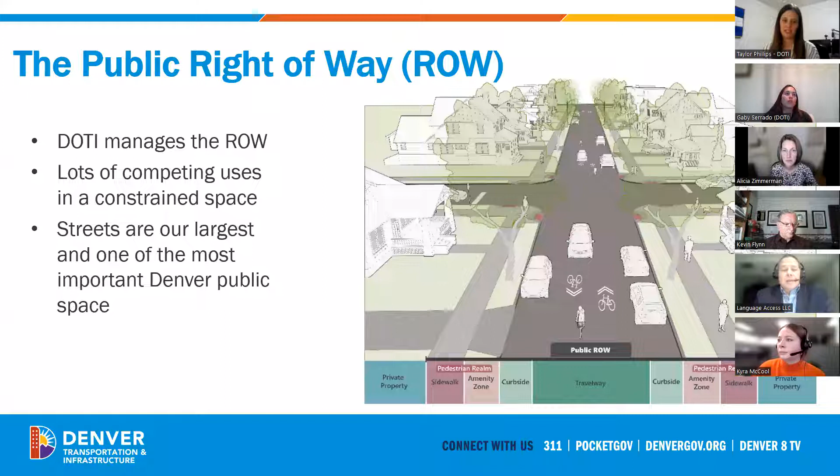So why are we building safe and comfortable bikeways? DRCOG, the Denver Regional Council of Governments, conducted a study a few years back and found that about 16% of people in Denver regularly feel comfortable riding a bicycle in Denver today. We call those the highly confident and the somewhat confident group.

And then 75% of those folks said that they would ride a bike if there were more comfortable facilities to do so. So we call those the interested but concerned group. We're really trying to target this group and provide bikeways that they feel comfortable riding on. This could be anyone from older adults to little kids to just anyone who doesn't feel super comfortable sharing the road with a car.

This is kind of how we got here. In 2011, we adopted Denver Moves Bicycles, our first citywide community-driven bike master plan. In 2015, this project, West Yale, was also recommended again in the update to Denver Moves Bicycles. Then in 2018, this project was again confirmed in Blueprint Denver as a bicycle priority corridor. And now here we are today - we've identified this opportunity to restripe the roadway through a planned paving project.

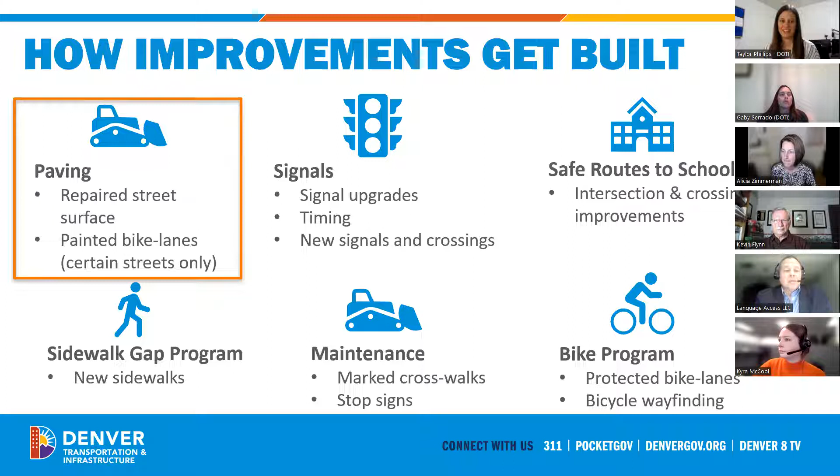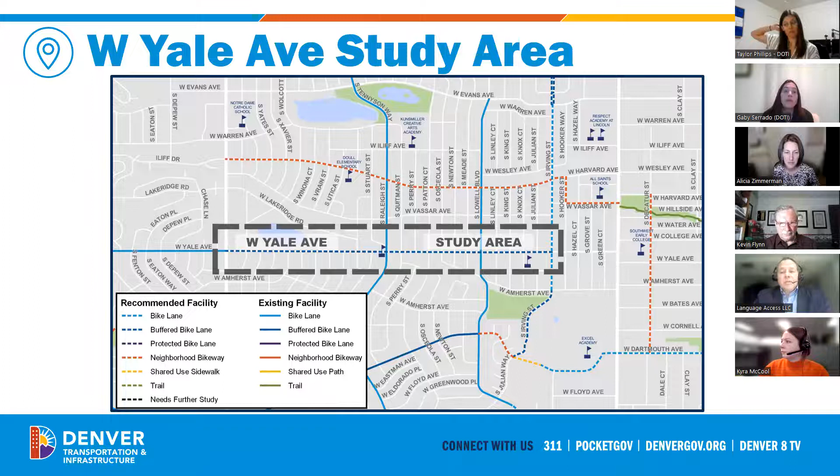Now the existing conditions - obviously you all know Yale. Next slide please. Obviously a lot more than we do, but the stretch in particular is a mile and a quarter. Yale is considered a collector, the posted speed limit is 30 miles per hour, and we have these really narrow sidewalks throughout the corridor. These are basically grandfathered in, based on when the neighborhood was redeveloped back in the 70s and 80s, and those were the standards, unfortunately, back then. These are the type of sidewalks over there.

Like I mentioned, we do have bike lanes on the west side of Sheridan Boulevard, but this is also a transit corridor - the number 35 actually runs every 30 minutes or so. The cross section right now on Yale - one of the reasons why it seems really, really wide is because parking is technically allowed on both sides of the street. So we have 36 feet from curb to curb of space. But that's one of those issues on Yale.

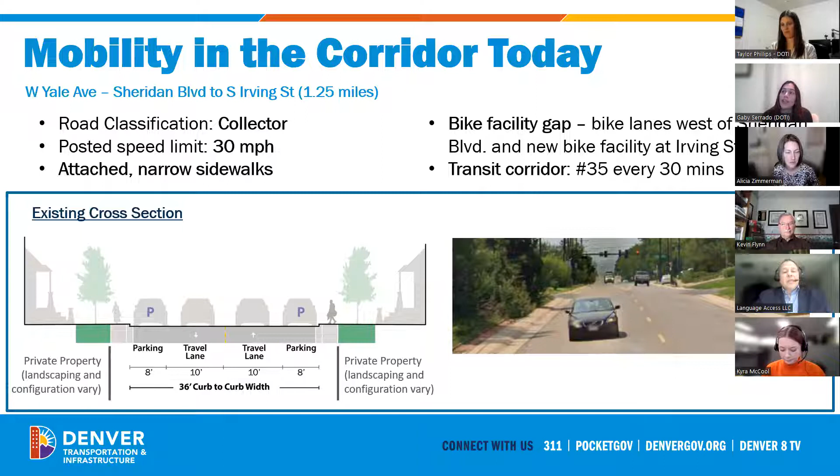If you go to the next slide please - why we're seeing such high speeds on the corridor is because it's so wide, and we definitely don't have that many people parking there at all. So like we mentioned, it's 30 miles per hour, but when we gathered the data going westbound we're seeing 37 miles per hour, and going eastbound it's 39 miles per hour. We have about 9,400 average daily vehicles going through this particular section of Yale, and this is way above our comfortable standard of variation when it comes to our streets and speeds.

So again, it's posted at 30, but we're seeing on average 39 miles per hour, which is not great whatsoever. And obviously, like we mentioned, one of the main reasons why we're seeing such high speeds is a really wide corridor, 36 feet, and we don't have people parking there.

When we have gathered counts on Yale at two points, one was between midweek in the AM, to assess that residential parking component to Yale. And then the other one we assessed because we have two churches on this corridor, in this mile stretch. So we also took a parking count during church hours, just to see what we're seeing on the corridor. And we're still seeing less than 15% utilization rate — it's actually closer to 5% utilization rate overall.

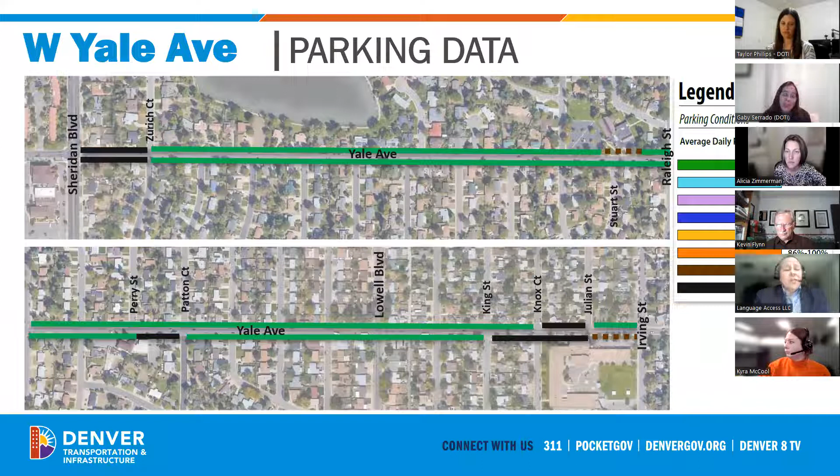So just imagine this is one of the main reasons. You basically have this really wide road throughout, and nothing really can stop somebody, aside from the traffic lights that we have along the corridor itself. So those are one of the reasons why we have such high speeds in the corridor.

We also have a really high number of crashes that take place on the corridor as well. In total, in the last 5 years we've seen 85 crashes on the corridor, with 6 of them being bicycle and pedestrian — a car hitting a pedestrian, somebody walking, or a car hitting somebody riding their bicycle on the corridor.

This is really concerning, as 4 of the vulnerable road user crashes have actually taken place by Gust Elementary, which is definitely not acceptable whatsoever. None of them are acceptable, but obviously when kids are involved, it's a different story — it's a next level. So we are seeing these really high crashes; we have a lot of crashes overall in this corridor, and we need to definitely do something about it.

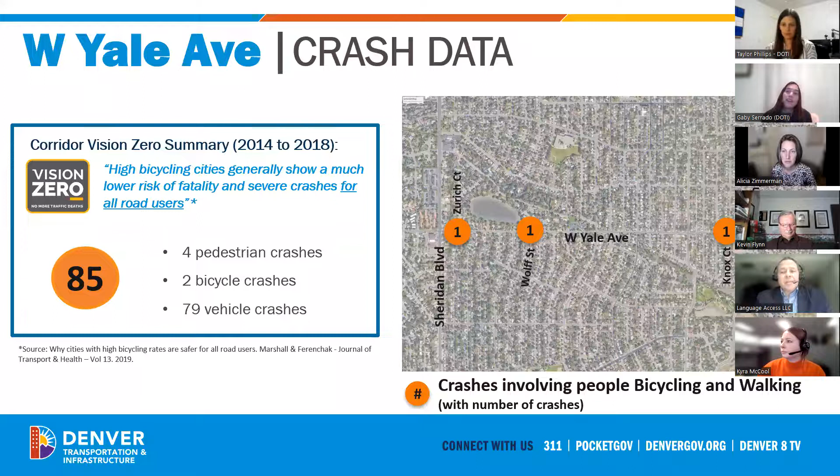We know that we need to go for that next level, but we're also very well aware of some maintenance elements, and then there's the community feedback as well — elements we heard back during the Irving conversations — of, let's try to address the speed issues first, and then come back later if necessary to put those vertical elements on it.

So at this first stage of this bicycle facility, what we are recommending is a buffered bike lane for the entire stretch of the 1.25 miles from Sheridan to Irving itself. In order to install this bike facility, we would be removing parking throughout the stretch of the corridor itself, and then we'll be adding additional components to call out some of the mobility benefits to the road users.

Right now Yale only has the center turn — the yellow center lines that you see on the road — they're skipped. Obviously we'll be changing that to a solid line, which should certainly help out. Then the buffered bike lane facility itself is going to visually narrow the roadway component, and provide that buffer from the really narrow sidewalk against the speeding vehicles. We are adding green crosswalk crossing markings at signalized intersections.

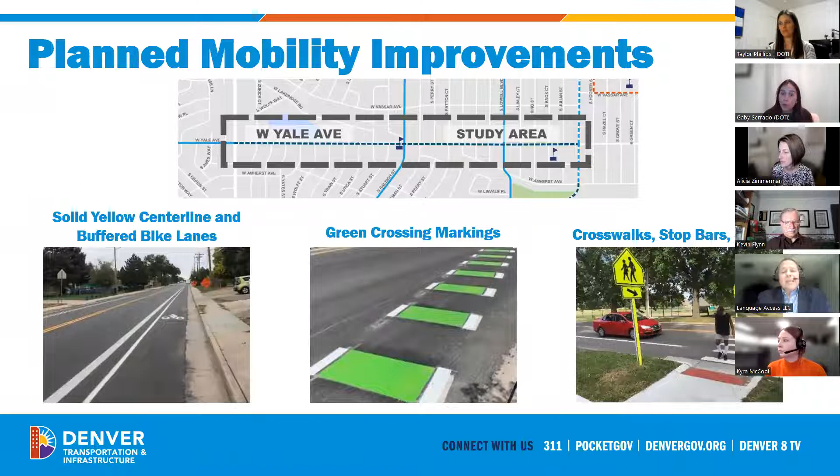So these would be right next to your traditional crosswalks, the bars that are right over there. It's a double enhancement of these areas, these major conflict points with the other modes, between people who are driving, people who are walking, and bicycling on the corridor.

So some of the project benefits, again, it connects to the destinations throughout the corridor. Like I mentioned, we have a couple of churches, and Gust Elementary as well in the area. This is considered a gap project because we have the bike lanes west of Sheridan, and the upcoming bicycle facility on Irving.

We're looking at improving safety through this corridor with additional elements. One of the major intents of all of this is that we're trying to build a network of bicycle facilities, the same way that we have different types of networks for our roadways, where we have arterial collectors and local roads. We're trying to build the same for bicycle connection as well, so that people can feel more comfortable walking and biking.

As we continue in their general trips, if you just need to go to the school to pick up your kid, or just need to go to the grocery store, so you don't have to hop on your car. That type, just building a quality network where everybody definitely feels safe.

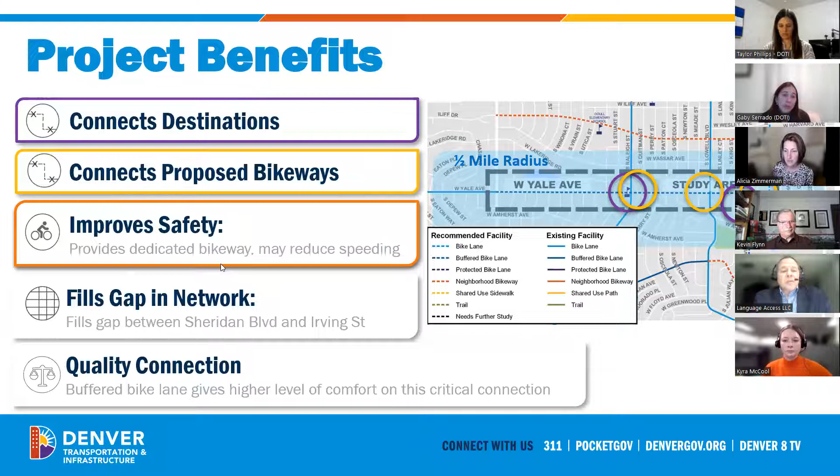After this, the team is going to come back and collect feedback. We've already held one-on-ones with the school and with the churches on the corridor. So we're going to take all of that feedback and start the next process of the design phase.

Then in May, we're going to come back out to you and show you the designs that we have for this corridor. We'll finish the design late this spring, and then we hope to install this facility in early summer. That was actually one of the requests by a few of our stakeholders and DPS, Denver Public Schools, to try to install it before the start of the school year in August, since this will be bringing new conditions to the corridor itself.

So I think we are ready, Alicia, to go to some of the breakout sessions, so we have ample time to hear back from you all about what you're looking for, right?

Yep, and I'm going to have the project team answer just one or two overall questions that probably everybody's asking right now, given some folks have mentioned them in the chat. I did see a few folks mentioning something about COVID impacts on the volumes and the data we have in both directions. For background info, the volume, traffic, and speed data we have is from pre-COVID, just before COVID started - I think it was fall of 2019 or January of 2020.

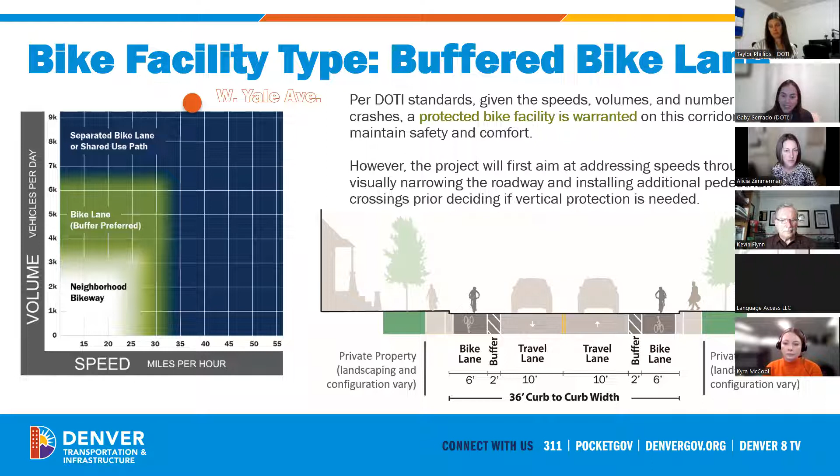Some of the lessons learned from a couple of other buffered bike facilities we've installed, on the west side of town, is that, for example, at Sheridan and Dartmouth, Councilman Flynn, that we installed—it was there, right? Oh sorry, you're on mute, I see you're shaking your head.

So at Sheridan and Dartmouth. It was at Sheridan and Yale, by the church at the top of the hill on the west side, where we have the vertical posts. We can see that right now. Dartmouth is just painted lanes.

So actually it's on the other side of this whole corridor, this same corridor, so you guys can actually go out there and see it, where we at first originally didn't have any level of protection. Unfortunately, we kept hearing through 311 that people were using that bike lane to turn right onto South Federal, South Sheridan Boulevard. So we will be adding that level of protection at the signalized intersections on this corridor, so you'll be able to see it.

We're also trying to analyze some requests given by Gust Elementary as well—some of the folks are there. So that is the main difference between a buffer and a protected facility: basically that vertical element, which will obviously prohibit somebody from utilizing that space overall.

I said that was going to be the last question, and I want to make sure we can get to the breakouts, but quickly, since there was another one: the bike lane being considered as proposed is both on the north and south side, so it's two directions, one each way.

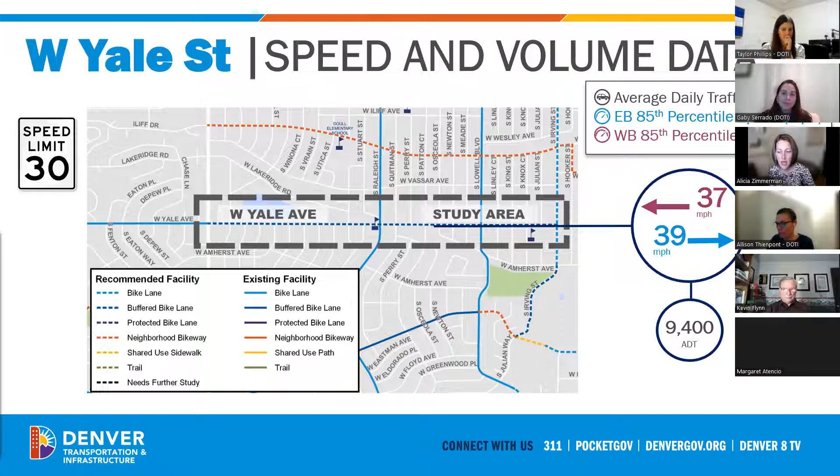So I think with that, we're going to go ahead and try to get to the breakout sessions. I saw that Sarah had her hand up earlier and asked, can West Yale be made wider? Unfortunately, the answer is no. In order to make the street wider, we would have to take people's front yards and side yards, which is not something anyone wants and is extremely expensive. So unfortunately, we can't widen the roadway.

Any other questions before we move on to our next steps? What about West Yale and Sheridan? If you're going east on Yale, you approach Sheridan, there's a left turn lane—would there no longer be a left turn lane?

We are analyzing that. We're trying to figure out exactly—we're conducting count movements on Sheridan and Yale. Obviously, we don't want to take out that left turn lane if it's going to induce a lot of volume, people just lingering trying to make that light. So that's still part of that design process. We're trying to figure out how to make it a safe facility crossing Sheridan, because we all know how unsafe Sheridan is, while also balancing not congesting the neighborhood inside Yale.